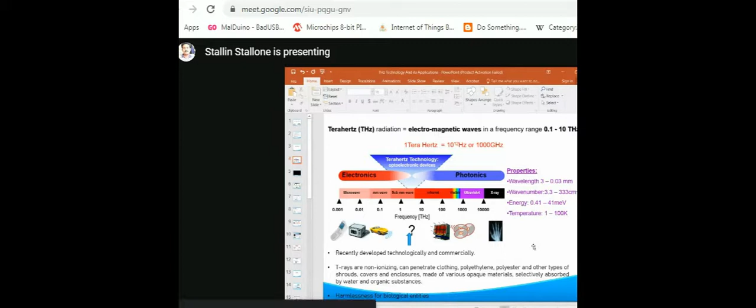So this is recent research. This is a recently developed topic, both technologically and commercially. Before, it was called sub-millimeter wave, and now there are several research efforts going on to use terahertz because they are at high frequency levels, in higher orders. So it is a recently developed topic, and it will be commercially applied in future.

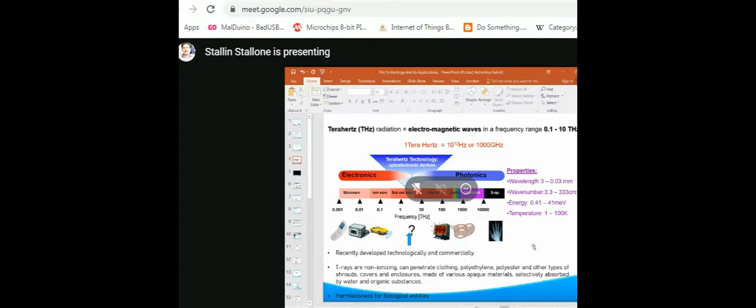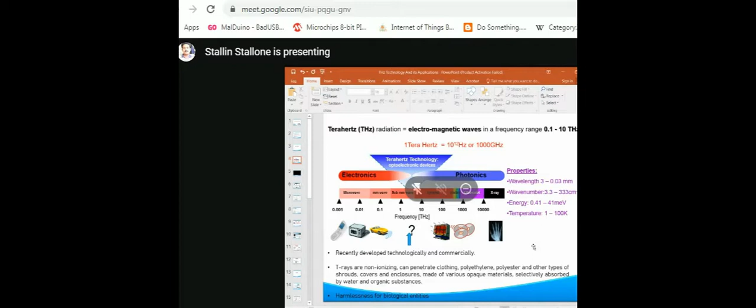Why? Because these terahertz rays can penetrate through materials like clothing, polyethylene, polyester, and some other covers, some shrouds, and they can be absorbed by water and some other organic substances. And these waves are non-ionizing. Therefore, they will not have any harmful effect on our body or our tissues. They are harmless for our biological entities. They are non-ionizing, and they can penetrate through several materials.

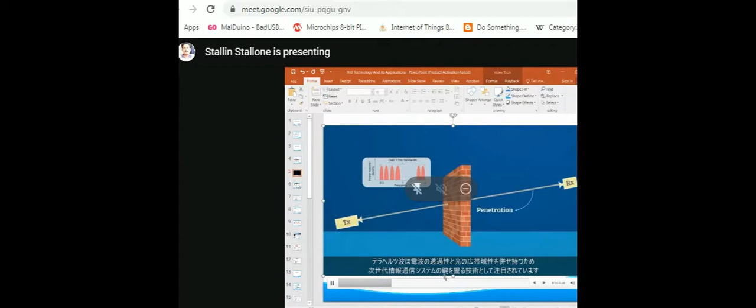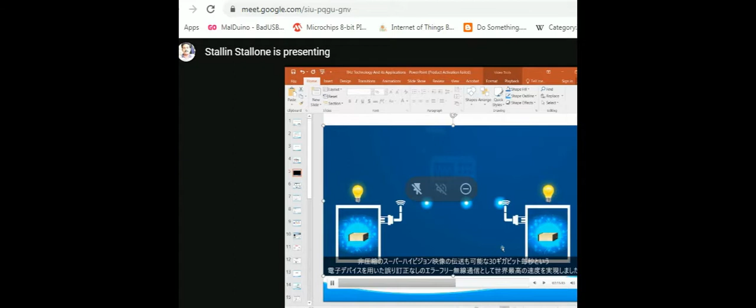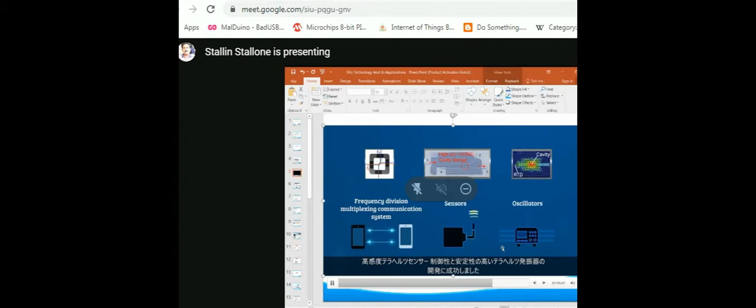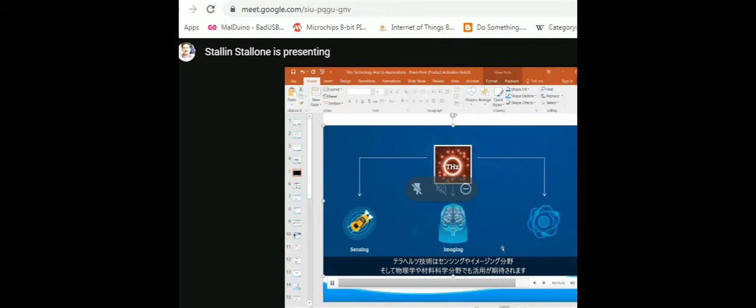The audio is available? Yes, I'm audible. Sir, you're audible, but the volume is very low. Okay, madam. Let me check again. Okay, I hope now it's okay. Can you hear me? Yes, sir. Now it's okay.

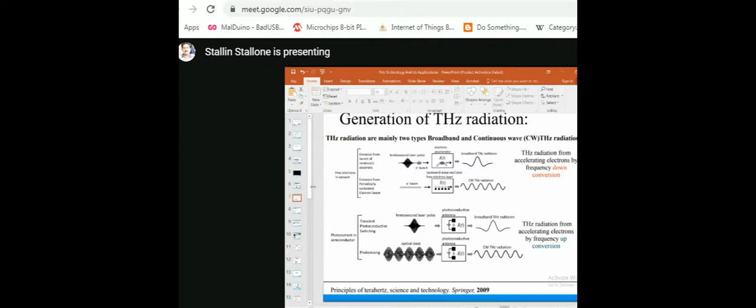So what is the principle behind this generation? It's a photocurrent. It's the derivative of the photocurrent. These terahertz waves are produced by the photocurrent. It's directly proportional to the derivative of the photocurrent itself. So the photocurrent from, say, lasers is used in generation of terahertz waves. So it's a derivative of photocurrent again.

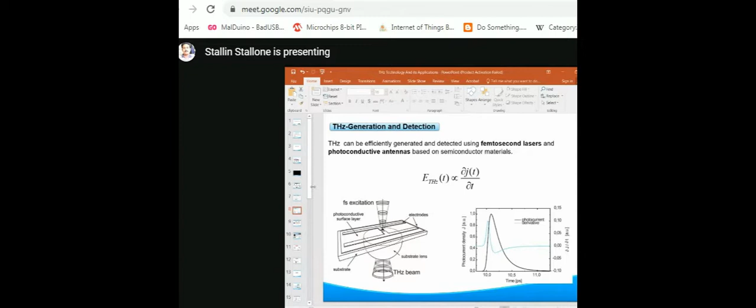So how are these waves sent and received? You can use a continuous wave or pulse from an optical signal source such as a laser. Femtosecond lasers are commonly used to produce these waves, and this will emit and pass through the object which needs to be tested, and it will be received and detected by a receiver. There is an optical delay because the signals should be controlled. There is an optical delay between the transmitter and receiver, and the object will be tested.

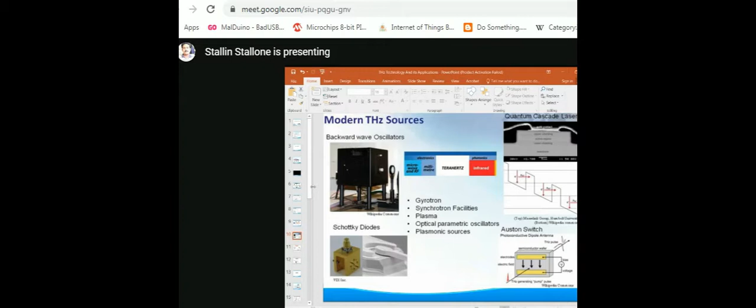And there are a lot of sources used from the early days. They use oscillators. They use Schottky diodes. As I said, they use lasers, and there are gyrotrons, synchrotrons, cyclotrons. There are several oscillators used in generating these pulses. These are some of the sources used in producing terahertz.

So as I told you, for a terahertz source, you may want broadband or a continuous wave. What is the difference between broadband and continuous wave? Similar to the other waves, broadband will have higher power ratings. For high signals we use terahertz broadband, and for low intensity detections, they use continuous wave.

So to produce broadband terahertz waves, they use Schottky diodes, some oscillators, and photoconductive switching. For terahertz CW, there are backward wave oscillators, quantum cascade lasers, and photoconductive switches used in producing these waves. These are devices which work on the principle of free electrons or photons.

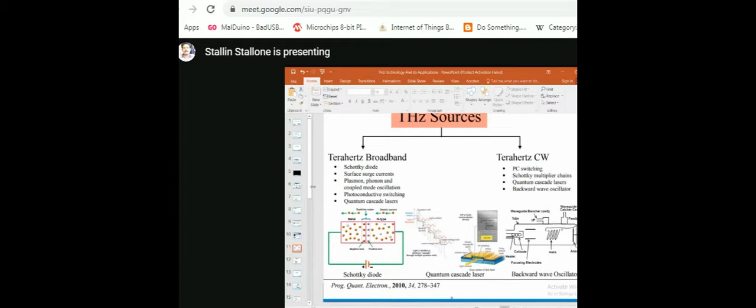And coming to the detectors, how to detect terahertz waves? You can detect using thermal means, using heat. There are heat-based thermal detectors used in receiving terahertz. Bolometer. A bolometer is an instrument used in measuring radiation when there is a rise in temperature. They use some thermal mass to receive the signals. It's used for measuring radiation.

Then pyroelectric. What is pyroelectric? They produce voltage when you heat or cool. When you make a cooling or heating, it will produce a voltage. They are called pyroelectric detectors.

And coherent detectors detect the amplitude and the phase information of the received light by interfering the received signal with local oscillators. The amplitude and the phase of the light signal interfere, are mixed with the help of a local oscillator, and it will be detected. Coherent means mixer, local oscillators.

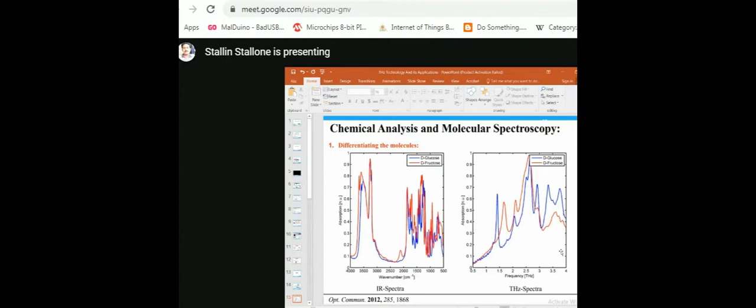And coming to, I want to find whether you are carrying illegal drugs or narcotics, especially in the airport. Many people smuggle, they carry drugs illegally, right? We see in the news that at this airport these people smuggled illegal drugs. So you want to detect the illegal drugs, even if he keeps it in his bag or any metal covered object. If you send a terahertz signal to these objects or packets, they will give you clear information that there are narcotics, illegal drugs.

So it is like a camera. We keep a camera in the airport, and this camera will send a signal to all the passengers. If somebody is carrying illegal drugs, your camera, which uses terahertz, will detect the person. Not only the person, it will also tell you what exactly you are carrying. Are you carrying any heroin or morphine sulfate, or any cocaine?

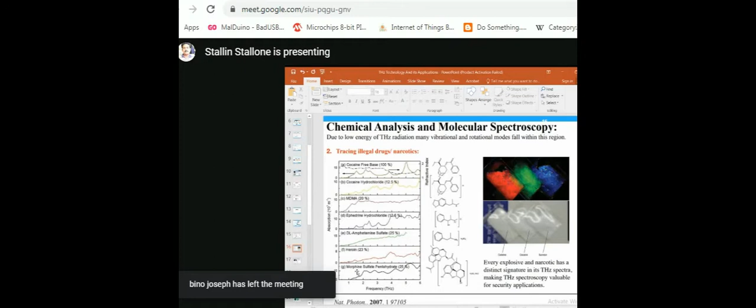Also tracing explosives, if somebody is carrying RDX or PETN. RDX and PETN are chemicals. PETN stands for pentaerythritol tetranitrate, and RDX stands for hexahydro-1,3,5-trinitro-1,3,5-triazine. These are chemicals, they are molecules, and they are explosives. They are dangerous to humans.

So if somebody is carrying them and terahertz signals are sent, he can be caught. You can use an imaging technique, or simply send signals, because they are absorbed by the chemicals. Terahertz waves are sensitive to these chemicals. So you will get a report if somebody carries any pellets or explosives; terahertz will catch you.

And at present, there are other methods using infrared, using some laser, they are doing it. However, if you use terahertz, it will be more clear in terms of frequency, and in terms of absorption, it will classify the material also. So it will help to identify the chemical illegally transported, etc.

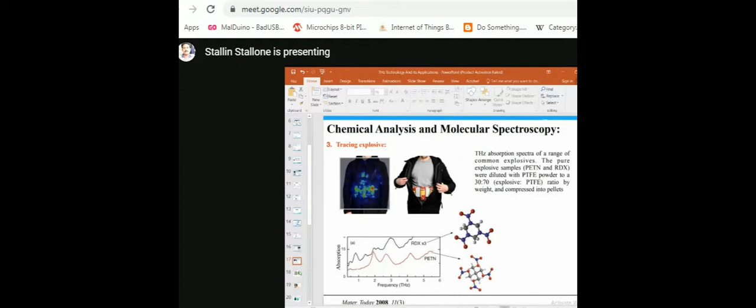Coming to biology and medicine, one more advantage of terahertz, they are very good with the water. They are very strong. Water is a strong absorber of terahertz. So in your body, you have water. If on the surface of your body there is any water level, or is it dry? You want to classify, you can classify it easily.

If you have dry skin and watery skin, these signals, if you send them to your body externally, will classify the water content. Where there is more water, where there is less water, it will classify. Terahertz can do that. So classifying the water content, where there is water content and where there is no water content, can be done by the terahertz signals.

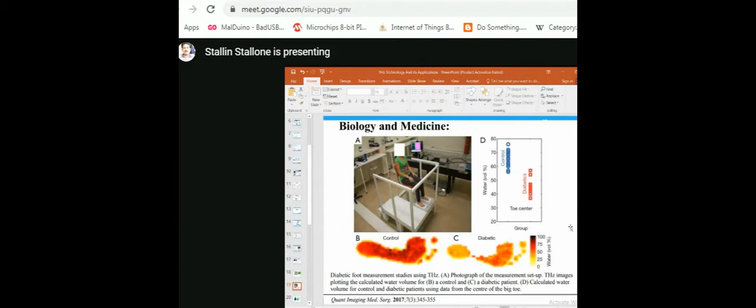Why is water content very important in leaves or the human body? Water analysis will tell you what is the condition of your health. It's one of the important studies. We can identify the health condition of your body if you have the water analysis. So water analysis is possible with the help of terahertz, because I told you terahertz and water are friendly. They are close. They have very good absorption properties.

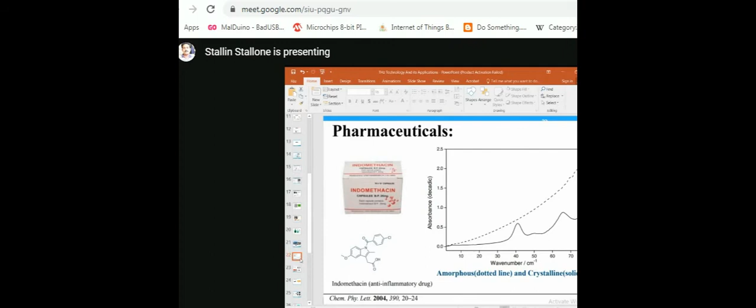Coming to imaging side, for example, you buy a chocolate which is in a box, a carton. You don't know how many chocolates are there, but you can count it without opening the container. Using imaging techniques of terahertz, we can easily identify the missing chocolate in a carton. In a small carton, they have a lot of chocolates. If anything is missing, we need not open it. Without opening, we can identify.

If terahertz is sent and the imaging techniques are applied, similarly, if you have any crack in your tiles, a very minute crack or broken part at your house, ceramic tiles or any tiles, these terahertz signals can pass through and give you a report on the missing or broken part. You can even detect if someone has hidden a knife under their shoe.

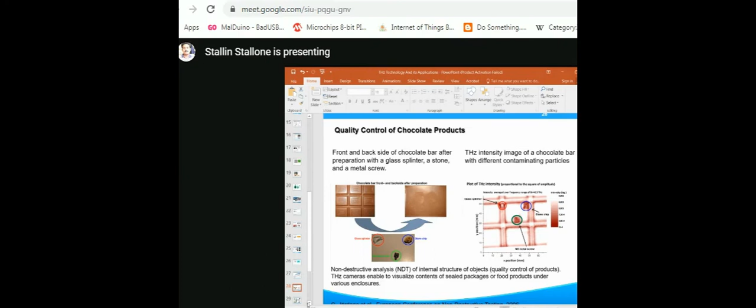In future, there will be a lot of scope where this terahertz technology will contribute in terms of healthcare, in quality control, and even for fault finding in wires or any public utility conduit. You can send the signal and do fault finding. They are faster, higher, powerful, and this will help in preventive healthcare, operation, and quality control.

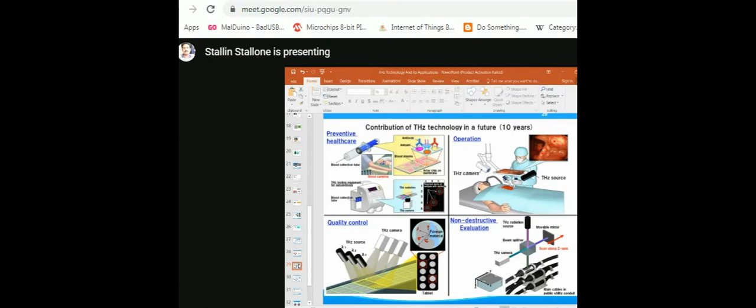Here is an example using a camera which uses terahertz. Terahertz can be widely spread or sent across the region. We need not stop the flow rates or check one by one; I can keep it open, and these terahertz will capture whatever I told you - any explosive you carry, any chemical you carry, any unwanted metal if you carry, these cameras will capture it, using terahertz.

What is the future of terahertz? There is a lot of scope. Countries have started investing in these things, because these waves have a lot of advantages, and there is a lot of scope for research and applications.

Where are these terahertz used widely? They are used mostly for manufacturing and security. By 2007, they were used only for security purpose and manufacturing, but by 2017, we started using them in other fields - communication, agriculture, even food, and environmental studies.